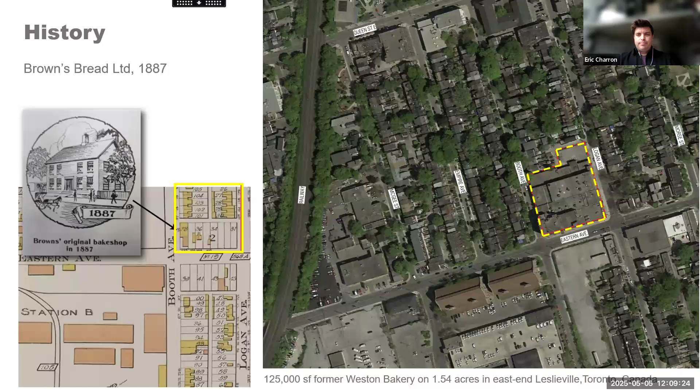As the bakery grew and its scope of sales and manufacturing expanded, it also expanded on the site and became what we see today as a 4-story brick masonry structure that grew over 30 years, between the 1920s and the 1950s.

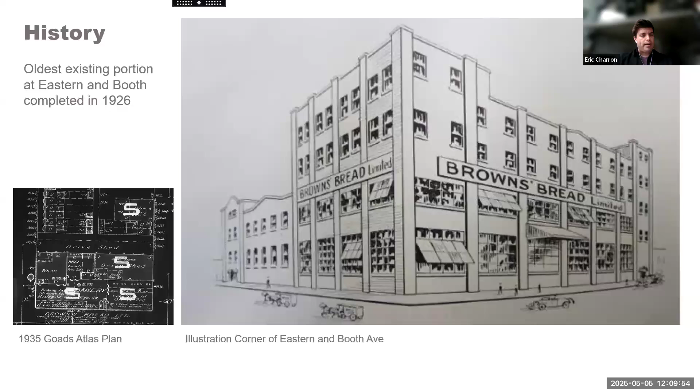You can see in the Atlas plan in the lower left corner, the site started expanding to the north and to the east until it eventually filled up almost half of a city block, between Eastern Avenue, the main street at the south, and Queen Street, a block north.

The bakery was active continuously for over 100 years in the neighborhood, 120 years, creating the famous Wonder Bread product along with other pastries and bakery products that were distributed throughout the city and throughout Canada.

The site closed operations in 2014, and the city recognized the building for its heritage and for its contribution to the industrial development of the city in 2017, giving it heritage protection status.

When Graywood and Alterra Developments, local developers in the city of Toronto, bought the site in 2015 or 16, they recognized the character of this building and that it contributed to the neighborhood. Working with Diamond Schmitt and GBCA Heritage Architects, they came up with what we see today in terms of the Wonder condominiums. This is a view of the original 4-story building and the 2-story additions built into the late 1920s and 1930s, also retained as part of this redevelopment.

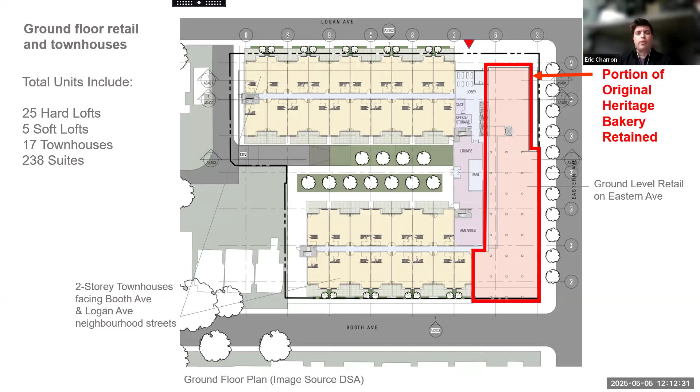The building is significant given that it contains 4 different residential uses. It contains hard lofts in the original heritage building, townhouses that are 2 stories along the residential side streets of Logan and Booth Avenue, and the balance of condominiums above. It's one of the few buildings I know of in the city that contain 4 different types of residential layouts—townhouses, condominiums, and hard lofts—all within the same building, as well as accommodating ground floor retail facing the main Eastern Avenue. You can see this here.

The new construction, which is set back behind the existing building, doesn't overwhelm the existing heritage building. It's stepped back both from the south so that the existing masonry structure is prominent, and the side streets step back both from Booth Avenue and Logan. They step inward, as well as to the north, the building sets back as well.

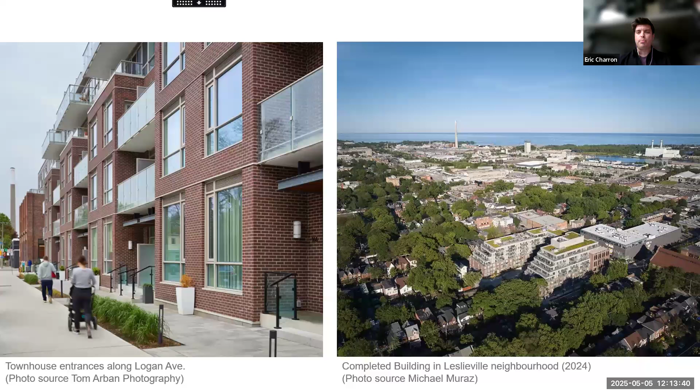Part of the character achieved in this construction was not just accommodating an adaptive reuse of the existing bakery and keeping that urban form still legible and prominent, but also adding a scale and character reminiscent of the other housing in the neighborhood—Victorian housing and worker housing—keeping that cadence and vocabulary in how the townhouse and building was scaled, so it didn't look like it was overwhelming the neighborhood, but looked like it was emerging from it and quite compatible to it.

The building was nominated last year for the Toronto Heritage Awards, and it did win a Canadian Brownfield Network Award in the rebuild category for brownfield remediation, which we were quite happy to accept as a finalist and a winner for that category.

Getting into the sustainable development strategies, the first item utilized as a feature to highlight was the salvage and retention of the original building, as well as its structure. Often today we see only facades retained in Toronto and other locations around the world, where only the exterior facade is kept and the structure behind is removed.

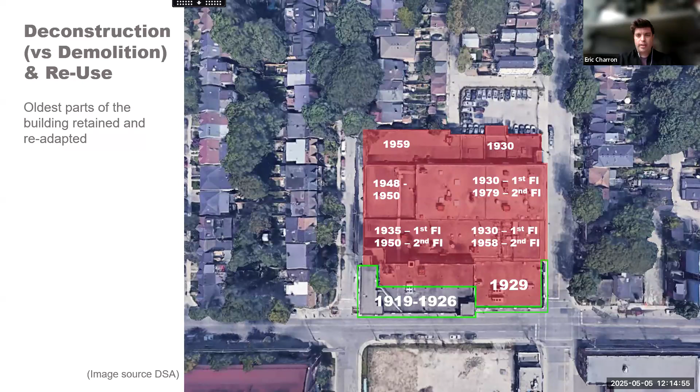This is what the building looked like before deconstruction started. It was typical mass masonry construction, 3 wythes of brick with steel structure and concrete floors. It has original steel beams and columns inside, poured concrete floors, and industrial windows that you can see in some of the interior photographs.

We also had to remediate a lot of contaminated and hazardous materials used inside. We had to decontaminate lead paint on the interior walls, remove mercury and other industrial substances that were part of the bakery functions.

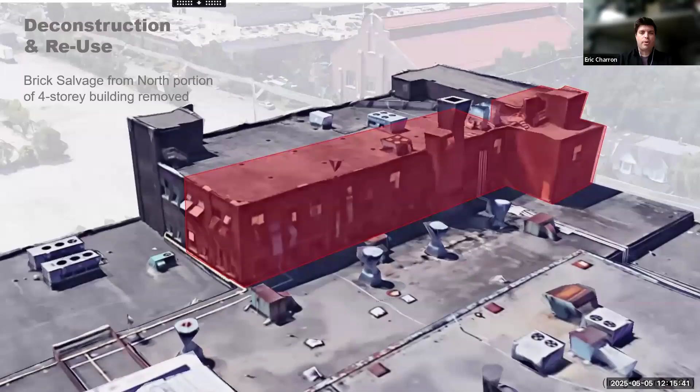The deconstruction highlighted here in red is the section of the original 4-story building that was deconstructed north of the original facade—that's 2 structural bays.

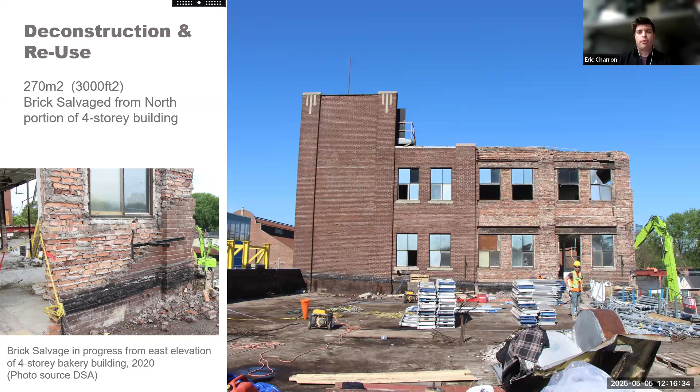Part of the salvage operations during deconstruction was saving almost 3,000 square feet of exterior face brick from the original north part of the building, so we could reuse, clean, and use that material for reconstruction in the new project, both for masonry replacement in terms of upkeep and repair of the original exterior, as well as creating new return walls pivotal and critical for the aesthetic and sewing in of the new building to the old building.

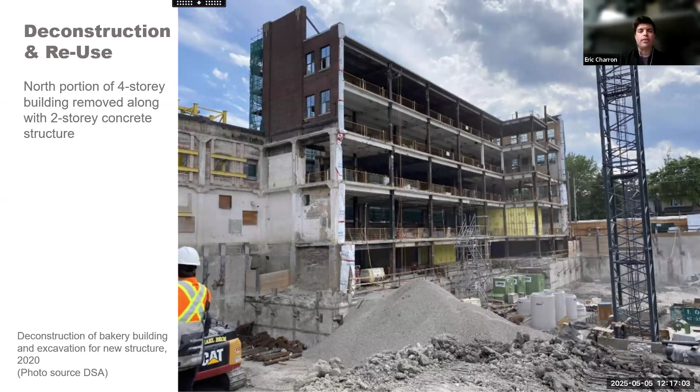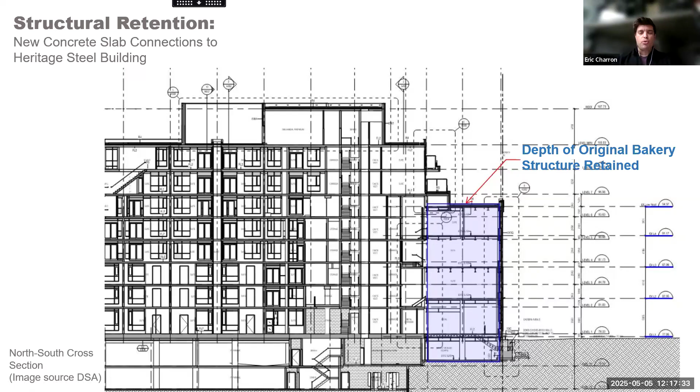Here's a cross-section through the proposed new construction, highlighting the section of the original bakery in blue that was saved and integrated into the new building. Part of the challenge with this project was negotiating the floor to ceiling heights of the original building with the new construction—the original building has 4 stories, but just behind it there are about 6 floors in the new building. Negotiating that was part of the challenge of this project, but ultimately one of the rewarding lessons learned in dealing with heritage buildings.

Part of the other salvage operations were the reuse of the original parapet wall terracotta tiles, which were removed carefully and then replaced as part of the reconstruction, as well as artifacts from the original bakery building that help interpret that previous use in the new building.

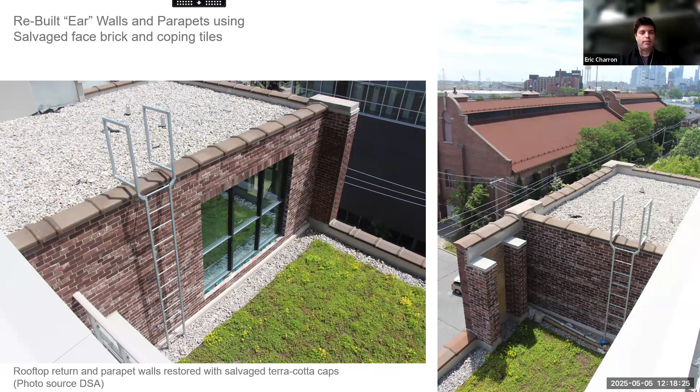You can see here in the completion photos some of that reused material at the top of the parapet walls, as well as some of the salvaged brickwork that was taken off the back of the original building and used for return walls visible from the street, to make the building look seamless in terms of the outside facade.

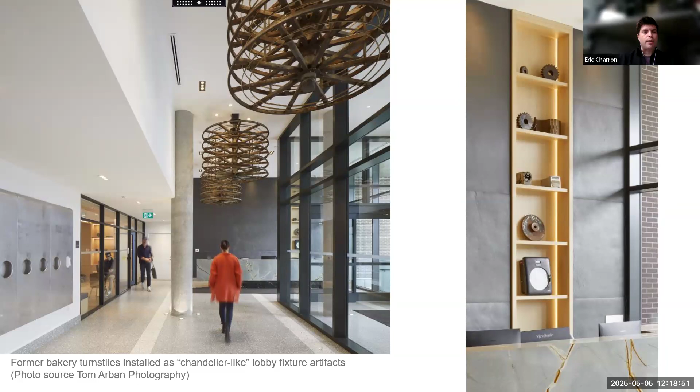Some of the old turnstiles that were used for the bread making functions in the factory building were reinterpreted as chandelier-like materials and hanging fixtures in the lobby, to harken back to that previous industrial use and provide some character and interpretive quality.

I'll let Carlos take over at this point to talk about some of the flood protection measures that were used. Thank you, Eric. Yes, when GBCA took over this building, we found—let's go to the next slide, please.

We found the flood risk that was based on the Regional Conservation Authority, shown in yellow, where the building is located. So it was still in the area that has a huge impact from the flooding from the Don River.

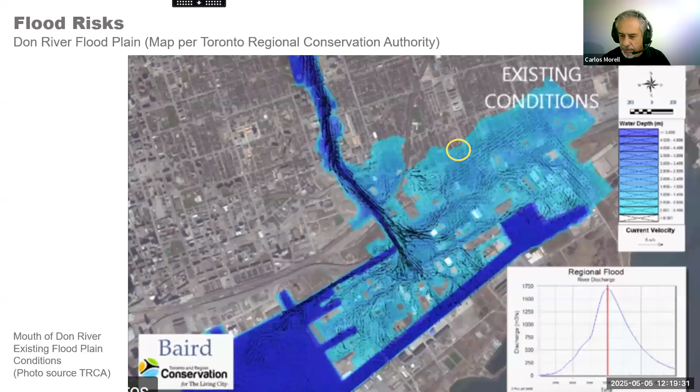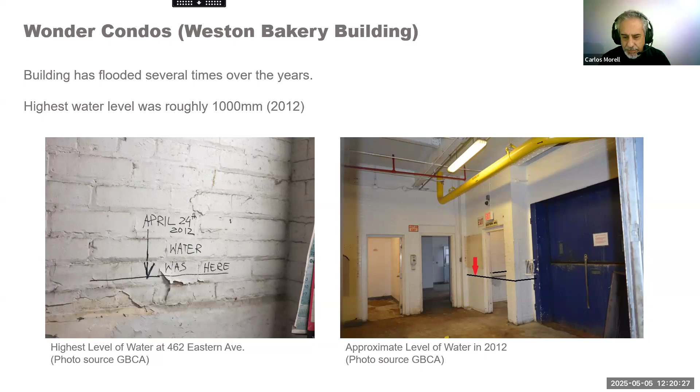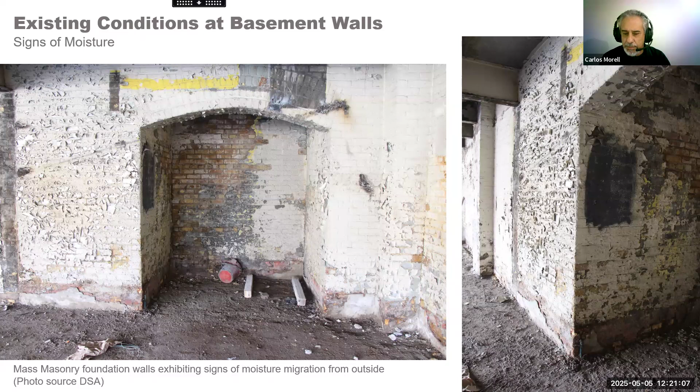When we got inside the building, these were conditions we normally saw at this level—a lot of flaking paint, a lot of debris, a lot of damage due to the flooding that had been happening in the building for years and years. That made us think we needed to do something about this, because the city was already working on a final solution for the Don River, but in the meantime, the building had to be put in place and put to new functions.

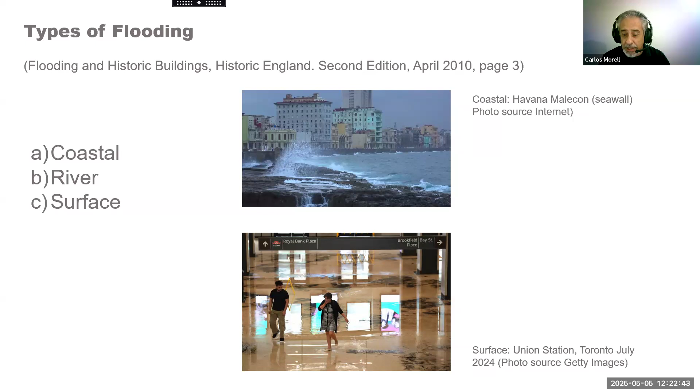The next type is river flooding, which is our case—we'll go deeper into that later. There's also surface ground water flooding, which normally happens in cities with heavy rainfall. It happens very suddenly, and the drainage system cannot cope with that amount of water in such a short period of time, which is when these floodings happen. This was very common in that area at Union Station—this one specifically from July 2024, not too far back in time.

So what we found, in doing this research for these buildings, is that there are several flood mitigation options that can be applied for heritage buildings. The first is the wet flood approach, which allows water to enter and exit the building—mostly what happened in this building over the years. The problem with this approach is that the foundation must resist the interior and exterior pressure from the water, and the building has proven that it was not bad at doing that over the years.

One point we want to make is that with this wet approach, you need to be careful when the building floods both inside and outside—you cannot remove the water from the interior too fast. You need to do it slowly, more or less at the same rate the exterior is going down. If not, you can create what's called a swimming pool effect, where the water pressure from the exterior is too much and can create cracks, fissures, and even cause the foundation to fail in some cases if it's not done well.

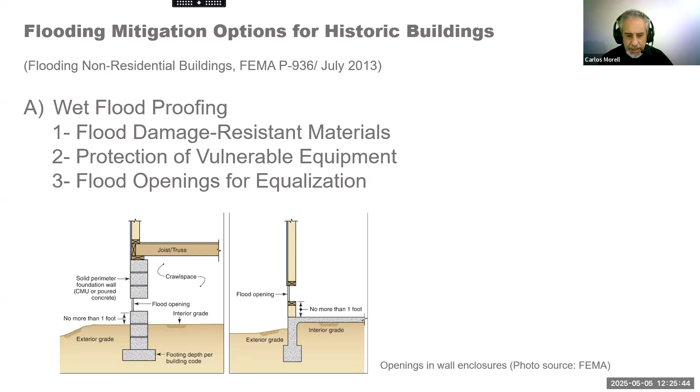So we found also that there is dry flood proofing. The problem is that dry flood proofing is the one that prevents the water from going inside the building. But the problem is that the foundation and the walls have to be strong enough to withstand the hydrostatic pressure from the water. We don't know exactly where the level is going to get to. It has to involve more structural engineer review for these elements, but it's also one approach that can be done.

This approach has four basic elements, continuous impermeable barriers, like shown in the photo on the left. You can see that the windows are removed and filled with bricks. Another way would be to leave the windows and apply a sealant around them, applied interior and exterior, to handle the positive and negative pressure from the water. This would be applied for doors and windows, utility penetrations, slabs, etc. It's going to be a little bit hard with bricks, like heritage buildings that are done with bricks. Trying to make this approach filling in this way is not going to be easy because with bricks you don't know how many cracks, fissures, and open joints you will have that allow the water going inside. But it's another option we can consider.

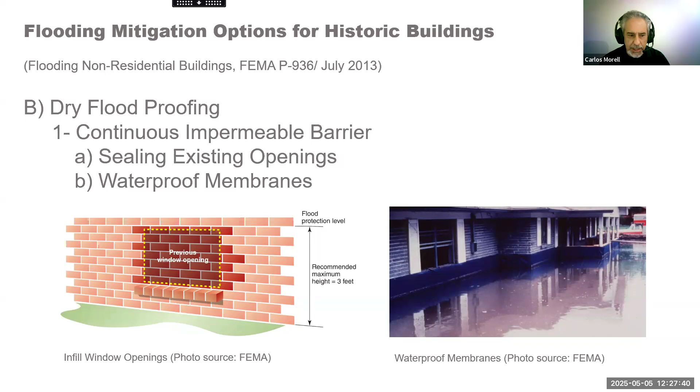The final element for these continuous impermeable barriers are flood barriers that can be temporary, removable, or even permanent. In the photo on the right, the white gate is installed permanently, so when floods happen it is closed and the buildings in the interior are protected. This one on the left is a hardware store in Darlington. As you can see, they are in a place where they cannot do this other approach, so what they decided was to raise the floor and install ramps for accessibility and stairs to make things easier for people going inside the building.

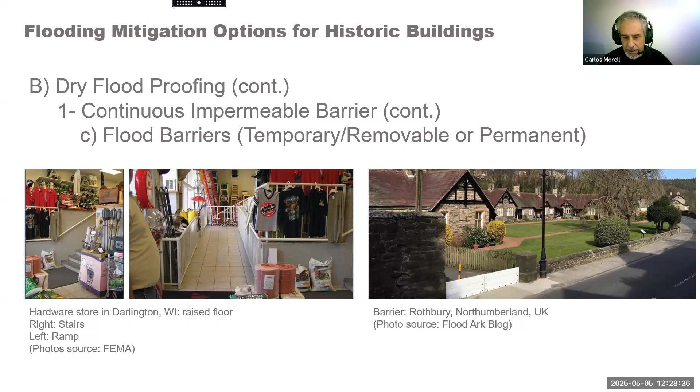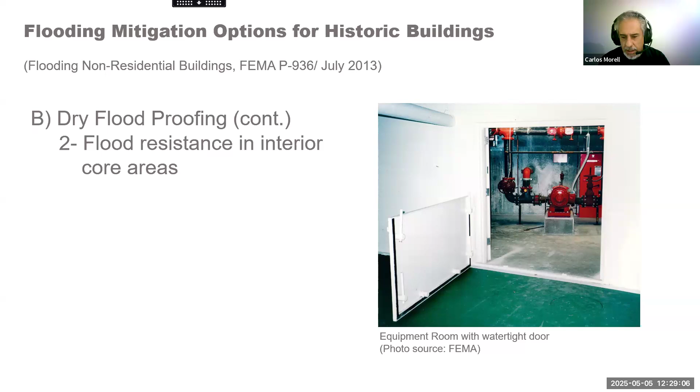Again, like in the wet approach, the flood-resistant interior for core areas, like in this case a mechanical room, where they cannot raise the floor. What they did was install a watertight door so when the floods come they close it, and the equipment is normally safe from the floods and these elements.

The final approach would be flood shields for the exterior wall openings. On the left you can see something that is removable, and another photo on the right. There are different approaches that can be taken in these cases, but you need to be careful because, as I said, the bricks can probably allow the water to go inside. We don't know if the wall will stand all this pressure, but it's another type of approach we normally consider for heritage, historic buildings in general.

Also, the final would be an internal drainage system. That is the primary method to remove the interior water, through a system that is going to be installed in the building.

Also, very common is to install backflow valves so the system closes and there's no sewage coming back into the building.

The problem with all these approaches is that, because of climate change, the level of flooding can change almost every year or every few years. To put this in perspective, when I left my former country back in 2005, the city of Havana's regulations were for hurricanes of 175 kilometers per hour. At that time, they increased it up to 200, because climate change has made flooding and hurricanes more frequent and more intense in almost every part of the world.

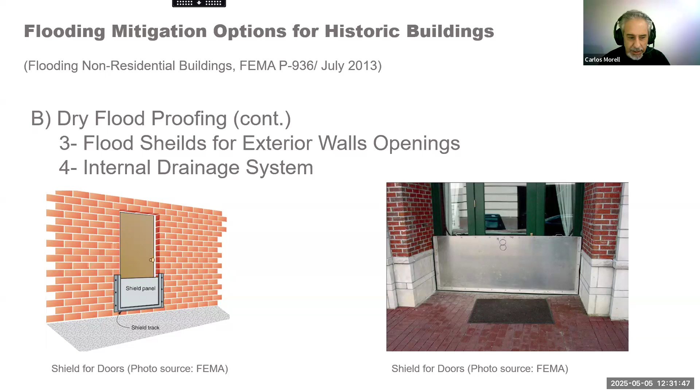Based on all the information we gathered from this building, we found that the best approach for this case, specifically for Wonder Condos, former Weston Bakery, should probably be a combination of a continuous impermeable barrier and a raised floor at the ground level.

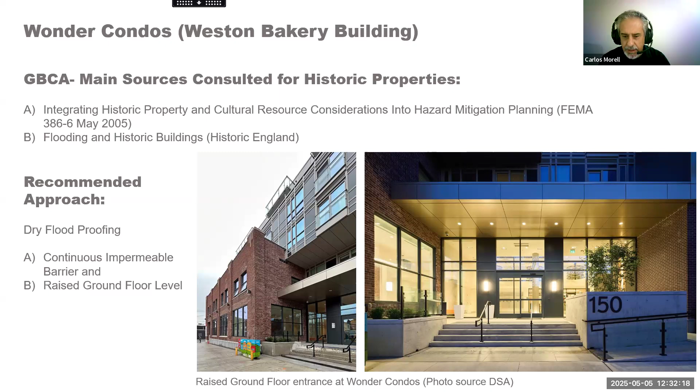That means we needed to determine the target elevation to protect the building. It would be 70.33.

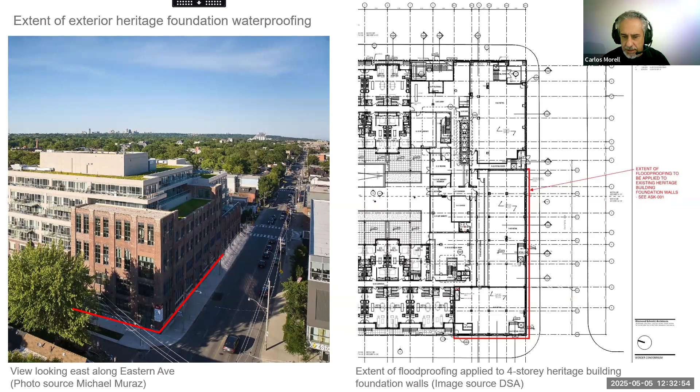In this case, you can see the waterproofing installed at the lower level. We needed to apply cementitious parging. The foundation was ready for this because it was from an early 1920s building, so it was feasible to install dimple drainage boards and other elements.

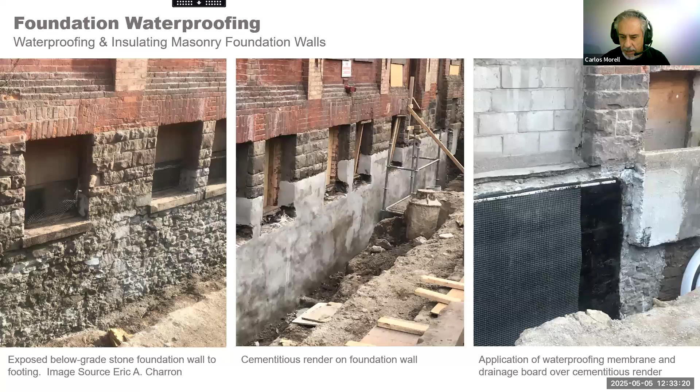In this case, I think Schmidt did a very good job preparing these details, as you can see in the photo on the right, installing the drainage board and these elements.

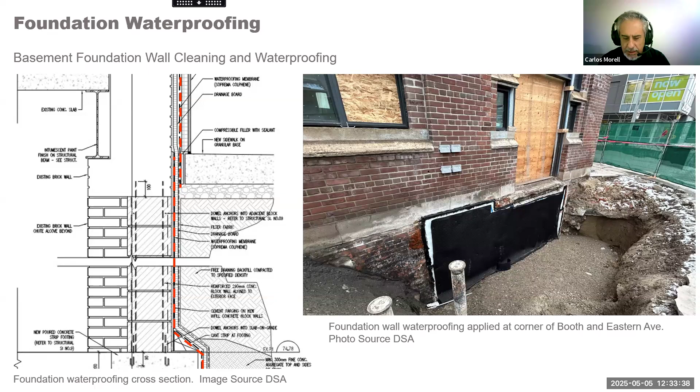You can see in this photo something installed to create that watertight membrane around the building. It has to be perfectly sealed, but at the same time this area is completely reversible, so these elements can be removed in the future and the brick exposed again. At this moment, though, it was completely protected from flooding.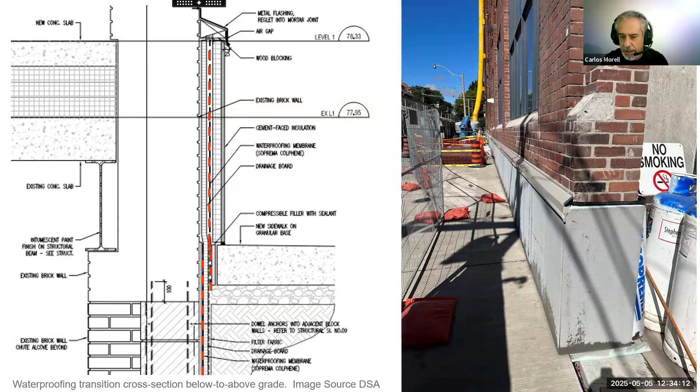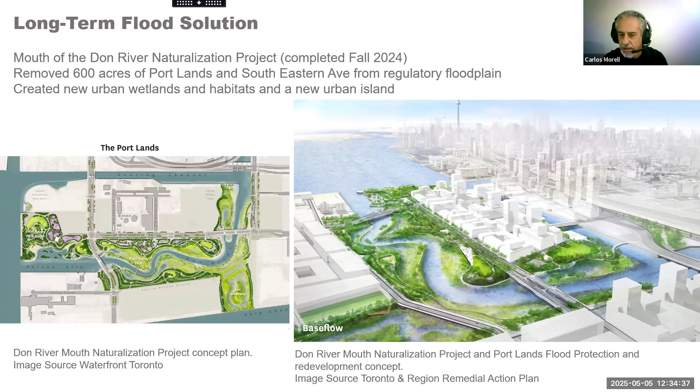The long-term flood solution was finished in fall 2024 by the city, and now that area is no longer susceptible to flooding, thanks to this work that created new urban wetlands and habitats—a new urban island. That means the area honestly doesn't need that impermeable barrier anymore. This is the downriver condition post-2023, compared to how it was before, when we started this work back in 2015, 2016, or around that time.

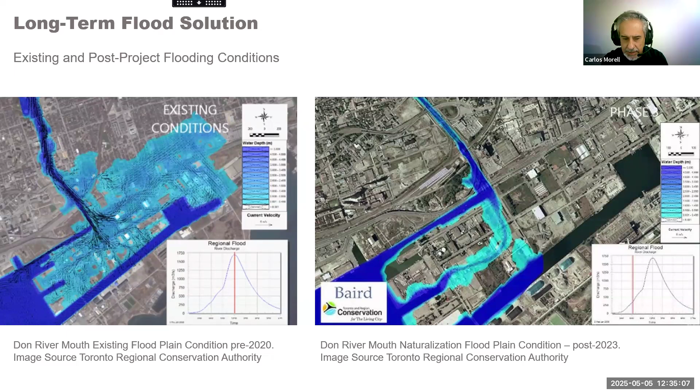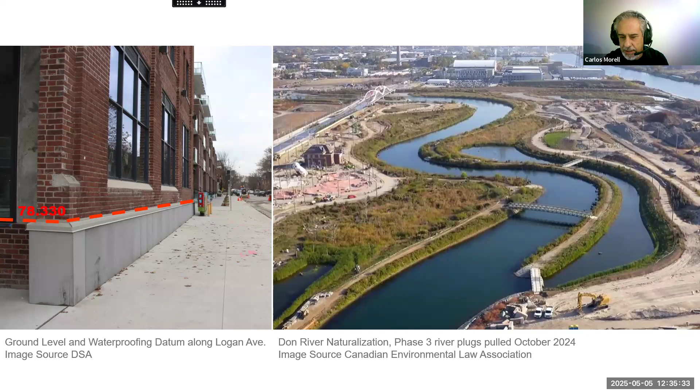Based on these things, we can see the building achieved—here's a photo of the waterproof membrane that was installed—and it's probably time for it to be removed if necessary, to show the brick again as it used to be.

Thanks, Carlos. That was a great description of that process in dealing with the flooding.

I wanted to also touch on a few of the resilience measures the project took to deal with moisture, because mass masonry buildings are exposed to the outside, but part of making this building feasible for residential use and thermally comfortable was to also insulate the inside of the building.

In the past, when arts groups and various organizations took over old factory buildings, they wouldn't necessarily occupy a space that was insulated—they were cold in winter, hot in summer—and that was also the case for this building. On the inside walls, it had plaster renders over the existing mass masonry structure. When we started revealing the inside and taking off those renders, we also discovered that some of the wall assemblies were not necessarily all brick—some was terracotta, some was concrete block.

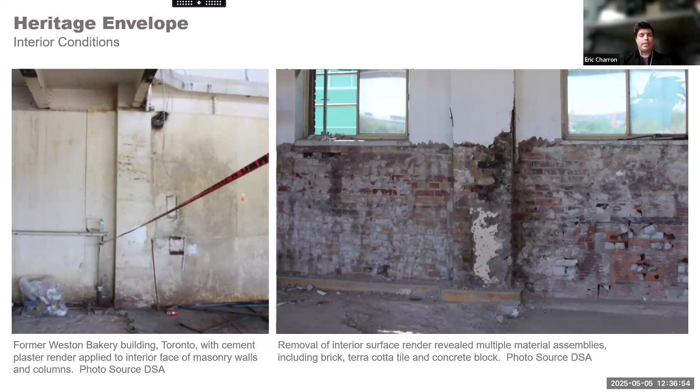It was a real mishmash of different materials used on the inside of the building that we didn't know about because it was all covered up. When we started pulling that material away, we thought we were only dealing with brick. In some cases at the ground level, we were dealing with terracotta tile.

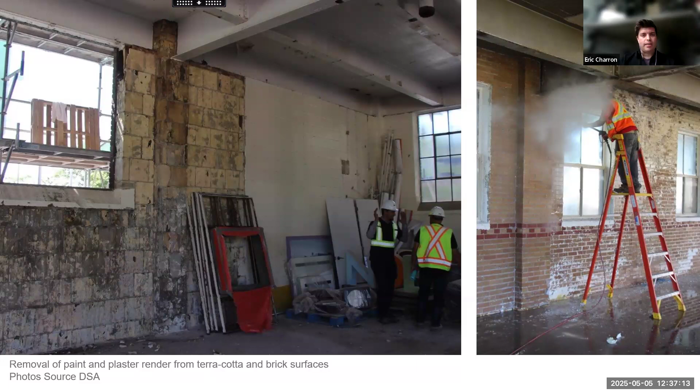On some of the upper floors, we were dealing with solid masonry. One of the challenges in finding a way to insulate this building for residential use was to apply insulation to the inside and not the outside, because you want to see the exterior masonry, which is part of the heritage fabric. So our approach was to use an offset stud wall on the inside of the heritage walls and install a maximum of 2 inches of closed cell spray foam insulation.

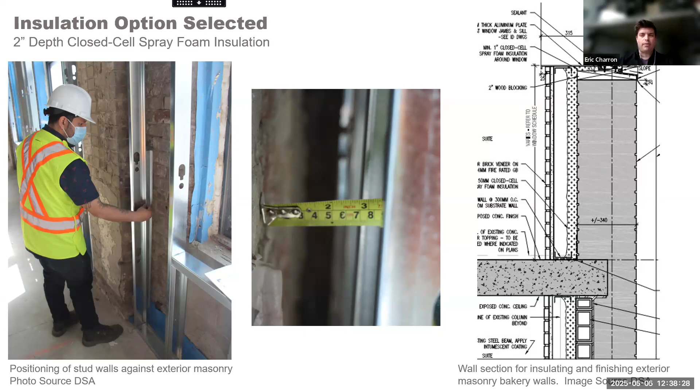The reason we used that instead of mineral wool is because 2 inches of closed cell spray foam still allows a certain level of moisture migration, letting the exterior brickwork dry out to the inside. If you apply too much insulation to the inside, the wall gets cold in winter and stays cold, whereas originally these buildings dried out through heat lost from the inside. All the warm temperatures inside the factories dried out any moisture that got into these walls. Applying just 2 inches of closed cell spray foam still allows a certain degree of drying capacity for the outside heritage walls.

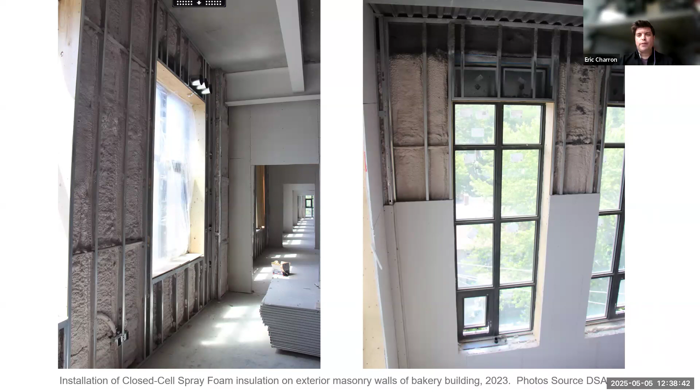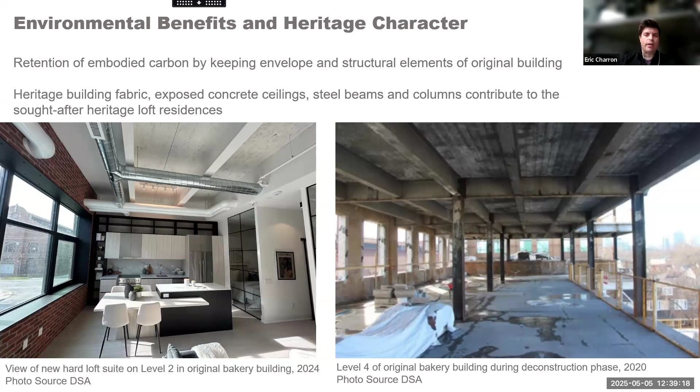You can see in these photos, during the fit-out and construction of the residential uses, the spray foam insulation installed between the stud walls, then fireproofing gypsum board applied on top. In these images showing the final layer, we added a veneer brick to give the aesthetic of heritage brick again—even though it's not original, it's the look desired for the hard lofts. By keeping the original steel beams and columns, intumescent-painting them for fireproofing, and leaving them exposed, we still get very tall ceilings, 12 to 13 feet in most cases, with exposed concrete floors and that highly sought-after heritage loft aesthetic these buildings can offer so well.

Part of the other measures we did as part of this project, which is a resiliency measure not just for this building but for the city, was to apply at least 60% of the rooftop as extensive green roof, allowing for water retention. Another measure we put in place was a water cistern at the parking level, which retains 100% of all the water that falls on the site.

So the more projects that are able to retain 100% of the water that falls on site, either through soaking up via green roofs or water cistern capacity, the more it helps alleviate pressure on the municipal systems. Toronto has a green roof bylaw, so every new building in the city is required to put in a green roof or a high-reflective roof system, both to reduce heat island effect and to account for water mitigation measures.